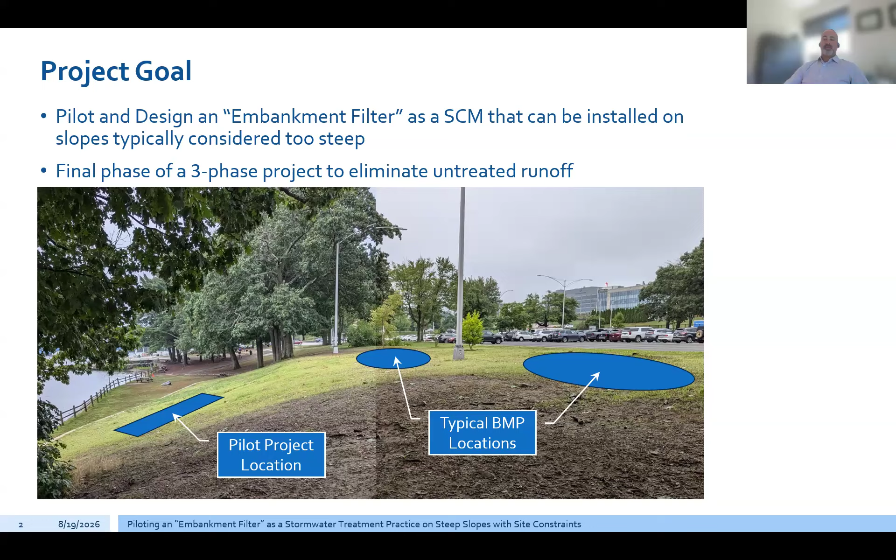And this project is a little bit unique as well, in that it's actually the final phase of what ended up being a three-phase project to eliminate untreated runoff through a stormwater outfall. The initial phase was conducted several decades ago, I think, that removed runoff from a portion of Lake Ave, as well as, I believe, a portion of the parking lot associated with that large building in the background there. More recently, DCR removed a large portion of the remaining parking lot, which was going to this outfall, and routed it through a rain garden. So this is like the last piece of the puzzle to get rid of what was previously an untreated discharge and now is going to be removed entirely.

So just quickly on the watershed and the receiving water. The site is located along the west side of Lake Quinsigamond, within a highly developed area. It's sandwiched between Lake Ave and the lake itself. It's located near Route 9. Interstate 290 is located towards the north. The watershed itself is very highly developed, as you'd expect for a water body located on the border between Worcester and Shrewsbury. There's a mix of residential development as well as commercial and roadway development throughout the watershed, as well as right along Lake Quinsigamond itself. The lake itself, I believe, is artificially impounded.

It's now about 4 miles long and has been used for decades now for a combination of swimming, boating, fishing, active, passive recreation, pretty much everything you could think of for a water body. Again, located within a heavily developed area, so it sees definitely a lot of usage throughout the whole entire year.

So Lake Quinsigamond itself is currently listed as impaired for bacteria, dissolved oxygen, invasive plants, as well as a number of other impairments. And most notably, Lake Quinsigamond itself flows to the Blackstone River, which goes all the way down into Pawtucket and Providence, Rhode Island.

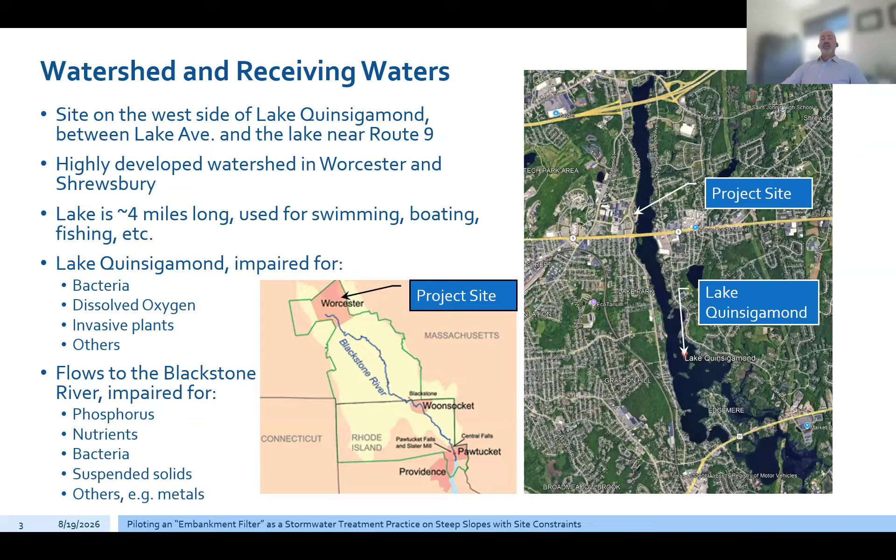And depending on how far you go, it's essentially impaired for not to say everything, but pretty much everything. Phosphorus, there's nutrients, bacteria, TSS. There's metals once you get further down there towards the mill towns around Woonsocket. So, definitely a lot going on with the water body and more specifically the site itself.

So the site itself is essentially located directly next to a heavily used parking lot. Through much of the weekdays, it's used as a commuter parking lot for there's a UMass Amherst, or actually I think it's UMass Memorial medical center that's located across the street. So Monday through Friday, this entire parking lot is filled with cars in every available space, and oftentimes in areas that are not necessarily spaces.

And throughout the weekends, there's a number of park users that are using it for swimming, fishing, et cetera. There's actually a swimming beach kind of just to the south further of the photo on the left. And what's even a little bit more interesting is it's actually located at a part of the park called Regatta Point. And the reason is it's periodically used throughout the years for sailing regattas. So it was actually kind of interesting that the satellites happen to capture one of these regattas in place.

So you can see that throughout the year you have these boat storage and not only boat parking, you have the boat staging areas, and then even next to where our pilot project location is, you can see the red and blue squares that are actually tents that get used for, I'm not sure, shade probably during the regattas themselves.

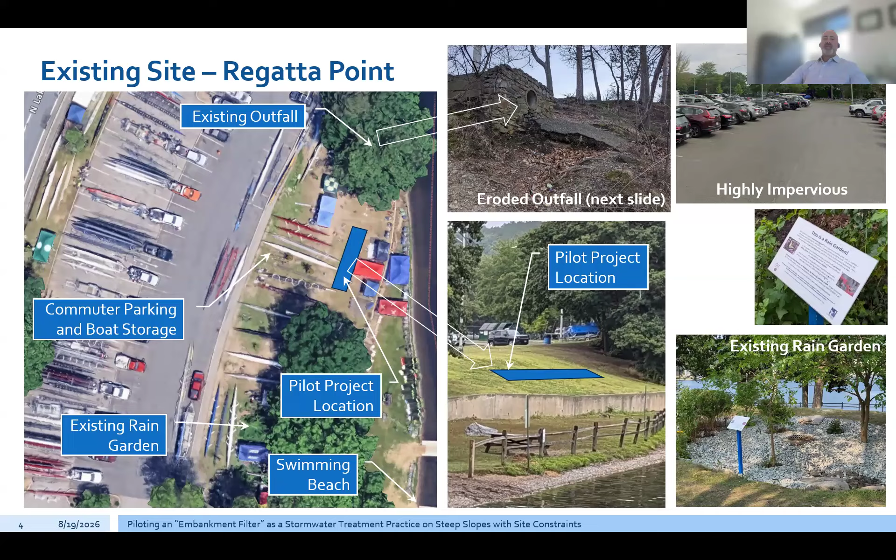I previously mentioned that there was a rain garden that was installed just kind of south of where our proposed pilot location is, which is capturing runoff that was previously untreated. The photo to the far right shows what it looks like relatively recently, along with a small informational kiosk that was developed. So our current site right now, which is what we're going to end up treating, discharges to the outfall as shown in these couple photos here.

So the one on the right kind of gives you a flavor of what's going on at this location right now. So the existing outfall is located about 12 feet higher than the lake itself. The runoff is running down about a 2-to-1 slope. You can tell that over a period of years, various efforts have been made to try and stabilize this slope. You can see there's asphalt that's been poured there in various stages of deterioration.

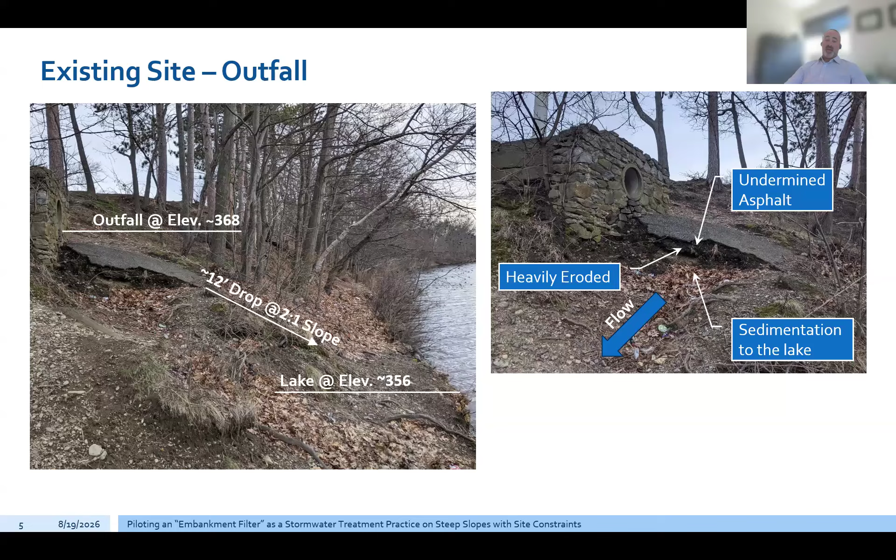It's been undermined, it's heavily eroded, and kind of all of which is providing sediment and sedimentation down to the lake that is currently untreated. So what we're really looking at doing is trying to remediate at least some of these impacts to the lake by installing a stormwater control measure or a BMP, again, in an area that you wouldn't typically put it.

So just some of the site constraints that we were dealing with as part of this project. So again, relatively steep, more or less kind of 4-to-1 slopes, as you can see in the two bottom photos. The one thing I haven't mentioned yet is, to make things even more difficult, at the bottom of the 4-to-1 slope, there's about a 4-foot high retaining wall that runs between the slope and about 10 feet away from the lake itself. And to make matters worse, again, it's a commuter parking lot. It's heavily used on weekends, weekdays, et cetera. So, we really couldn't be sacrificing any parking areas and so on and so forth.

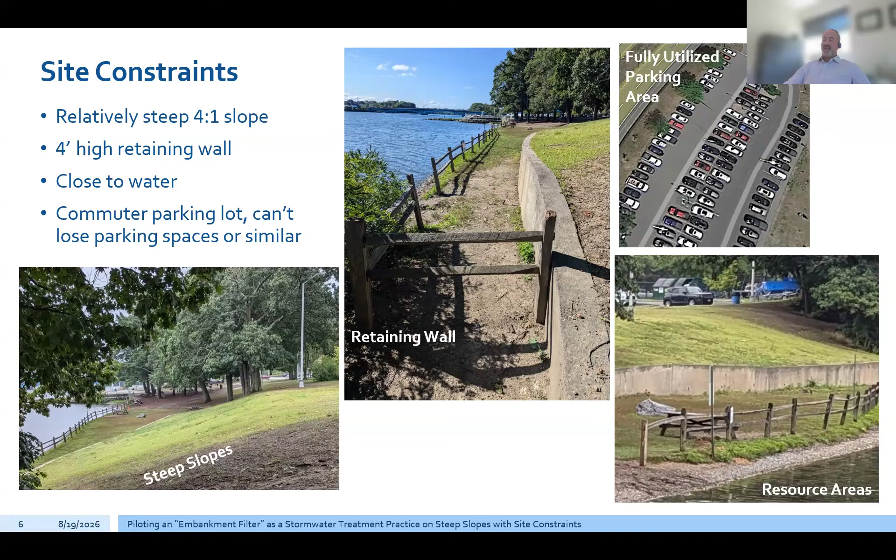So we tried to not make this difficult on ourselves, but we tried to kind of pick a site that you would certainly not be ranking at the top of your list to show that maybe something can be done at some of these locations with a little bit of creative thinking. So again, the last slide, I kind of mentioned that it's located close to the lake itself.

So there was a number of environmental permitting issues that we had to deal with throughout the project itself. So we're very close to inland bank, as you can imagine. The entire project itself is located within the 100-foot Mass DEP buffer zone. We also had 15-foot and 30-foot local buffers associated with the Worcester Conservation Commission and their local regs that we had to contend with.

And even more so, we also were in bordering land subject to flooding, which was actually a little bit surprising once we got into it because there's actually BLSF located above the retaining wall itself, which again is 4 feet high, 4.5 feet high, but most of it is located down towards the relocated outfall, which I'll get to a little bit later.

So total impacts ended up being about 4,600 square feet of permanent impacts within the buffer, another 10,000 and change within the temporary. Most of the temporary was associated with just grass seeding because the grass, as we were doing this project, we knew was going to get torn up by construction equipment, and the grass itself wasn't in great condition. So we wanted to, at least while we were out there, kind of take some steps to remediate and beautify the area while we were going to be disturbing it anyway.

So, what did we end up doing for this? Well, we ended up coming up with essentially a sand filter. We were a little bit limited again with the combination of the steep slope and then having to make it even more steep and the retaining wall about what we could do. So just kind of some of the key components of what we were getting at is in order to get some water storage is we had your existing grade, which is again about a 4-to-1.

We had to do some new grading in order to kind of carve out an area to do some water storage that is again on the side of a slope. So we needed to carve out some area that could provide some storage without making it so steep that it couldn't be maintained or mowed, or that it would be substantially detrimental to park users who, again, use this area a lot. So we ended up kind of carving out this area with some stormwater storage.

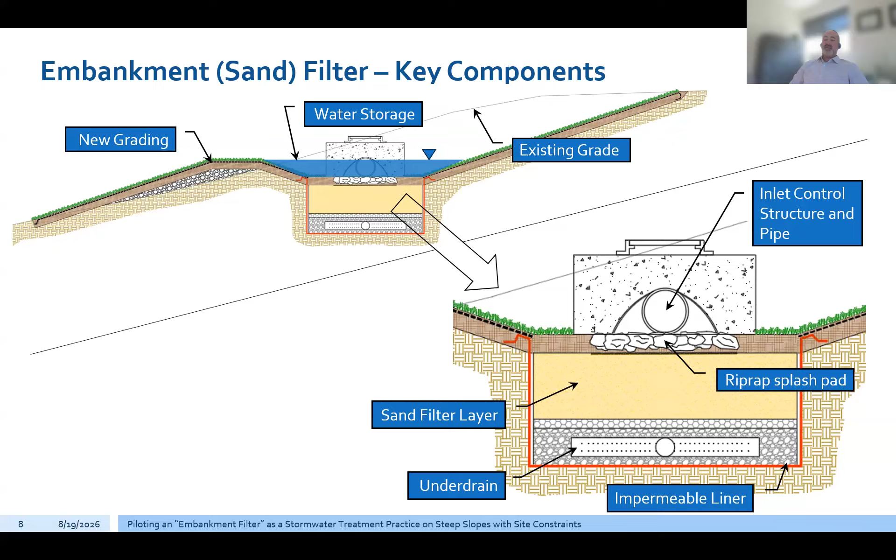And then down on the right is kind of like the primary features of what it is. So you have your sand layer, you have an underdrain layer to basically capture your runoff that goes through the sand, and then an impermeable liner because we don't want to be infiltrating at the site because again, it's located right behind that retaining wall, so we don't want to be contributing some hydraulic loading onto the retaining wall itself, or risking potential preferential pathway and a breakout of stormwater that could potentially break out along that slope further down and cause erosion or some other adverse impacts.

So the same thing kind of in profile view. So you have your deep sump inlet structure in the pipes along with a sediment forebay and splash pad. So we wanted to make sure that we provided some different options and different potential for a removal of sediment before it gets into the actual SCM itself. Again, the sand filter layer, which then filters stormwater down into an underdrain. We incorporated an underdrain cleanout in case there was sediment that maybe got into the underdrain and could plug it up.

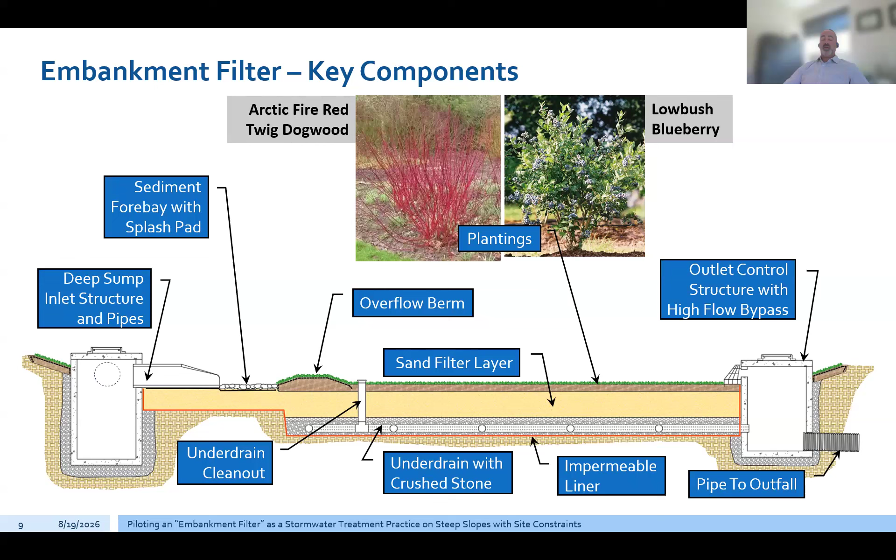We also incorporated an outlet control structure with a high flow bypass, which I'll get into how this thing actually functions during some low flow events and then high flow events in the next couple slides, but just to give you an overview of the different components. And the last thing that DCR ended up doing during construction is they actually ended up planting a couple plants that are sort of optional, but they thought it'd be beneficial to kind of beautify this area a little bit. So they planted some Arctic fire red twig dogwood and some low bush blueberry as well throughout the SCM itself.

So as far as how it works during overflow conditions, this would be in the event you get a thunderstorm or just something that the sand filter itself is incapable of handling on its own. So again, it flows through the deep sump inlet control structure and the sediment forebay for TSS. It will continue to go through the sand filter and get some treatment down into the underdrain. However, it will also flow through the high flow bypass and into the outlet control structure and then flow down to the lake itself. So what this does is it prevents the sand filter itself from becoming overwhelmed or backing up into the system. So it's trying to provide an additional way that the stormwater can outflow and bypass the system safely while preserving everything and then still making it into the lake itself.

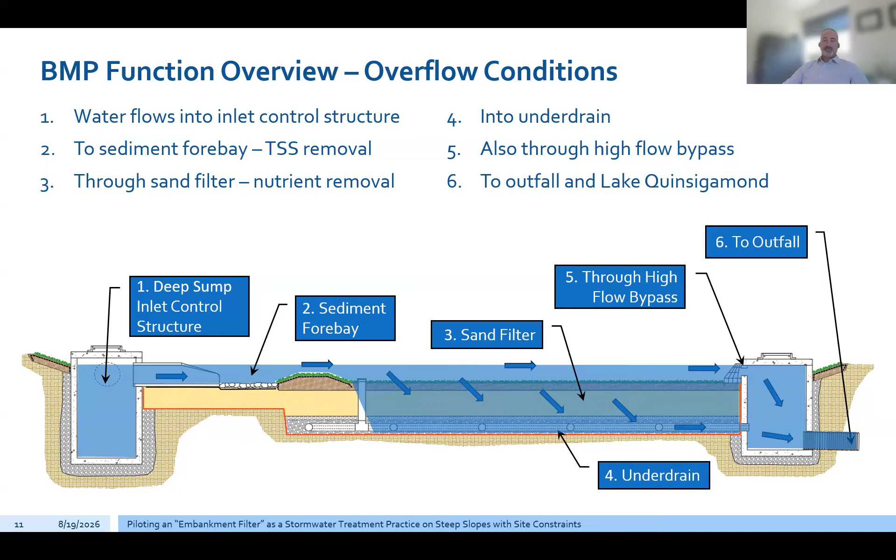So this is after construction. The photo on the left is actually what it looked like after construction. You can see that everything was kind of disturbed, and eventually it will grow in. So the two photos on the right, we ran it through AI real quick just to kind of showcase theoretically what it could look like if the grass were ever to grow in. I'm not sure it will ever get quite this lush, but possibly, who knows? The two photos also show the low bush blueberry and the dogwood that we installed, as well as the inlet control structure and the outlet control structure.

It's a little bit difficult to see based on the photos, but there is a small sediment forebay in front of the inlet, and even though it looks like the outlet structure itself is kind of flush with the bottom of the system, it's not. We kind of ramped it up, so there is some ponding, in other words, that will be allowed in this system before it actually gets to the outlet control structure itself.

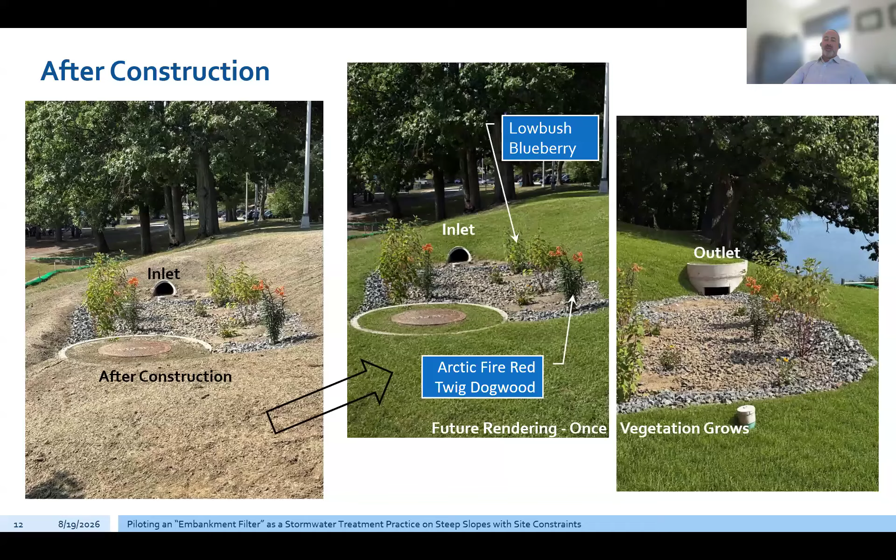So as far as water quality improvements, we were able to treat just about the 1 inch water quality volume. We came in at about 97%. One of the things that ended up being a little bit surprising is when we actually started the project, we thought there was going to be a bigger contributing area, but then once we got into it, we realized how much of the existing contributing area had already been disconnected. We were limited somewhat by a relatively small contributing watershed. So we only have about 0.2 acres altogether. Only about 0.11 is actually impervious.

So along with the relatively small contributing watershed and the site constraints that we had to deal with, that kind of limits our water quality improvement and phosphorus reduction potential. Even more problematic beyond that is that because we had the retaining wall, we couldn't infiltrate, which further reduces our phosphorus removal. But we got about 0.08, so not quite a tenth of a pound of phosphorus reduction a year, about 4 times that much of nitrogen, and then some TSS.

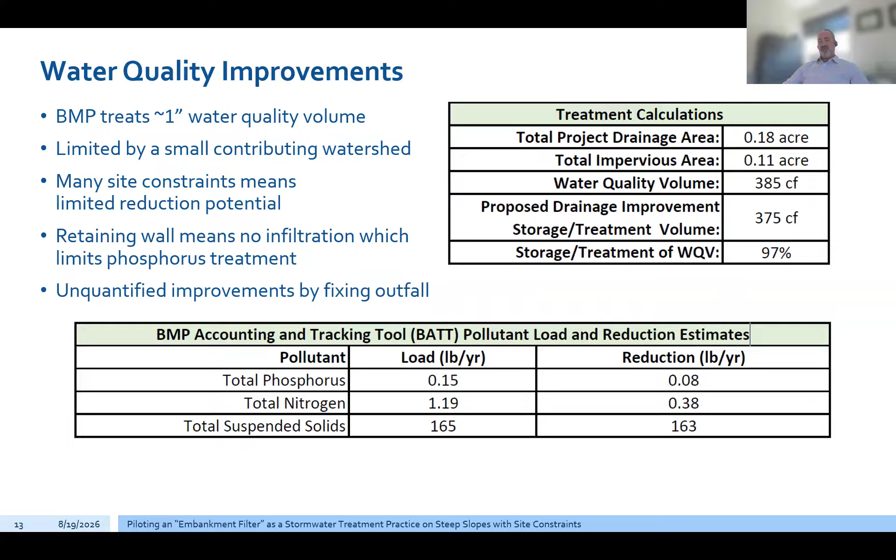And again, this is all based off of the EPA BMP accounting and tracking tool, or the BATT pollutant load and reduction tool. It doesn't include the additional reductions that we'd be removing from the water body itself by improving the conditions around the existing outfall, where it's currently eroding, contributing TSS and so on into the lake itself. So that's being stabilized. So there's those improvements as well, which are not necessarily being taken credit for by the BMP improvement itself, but it's still something.

Coming to some of the other project components, so we designed it for ease of construction. We didn't want to make this thing so prohibitively expensive or prohibitive that it was going to turn into a $250,000 improvement project that was going to have to be constructed with specialized equipment, and that couldn't be implemented by DCR themselves. I think DCR actually was able to utilize some on-call construction contracts, so they were able to basically build this thing using resources that they either had available or readily had available.

In the future, there will be a walkway with stairs and a railing for pedestrian control and fishing access. So there are a couple of reasons behind that. One is to try and keep foot traffic away from the BMP itself, as well as providing an access to what people are currently using right now for fishing access down to the pond and the lake. So there's already kind of a preferential pathway or a desire path that people are using to get down to the lake to fish. So DCR is looking at providing a formalized access way down to the lake at some point in the future.

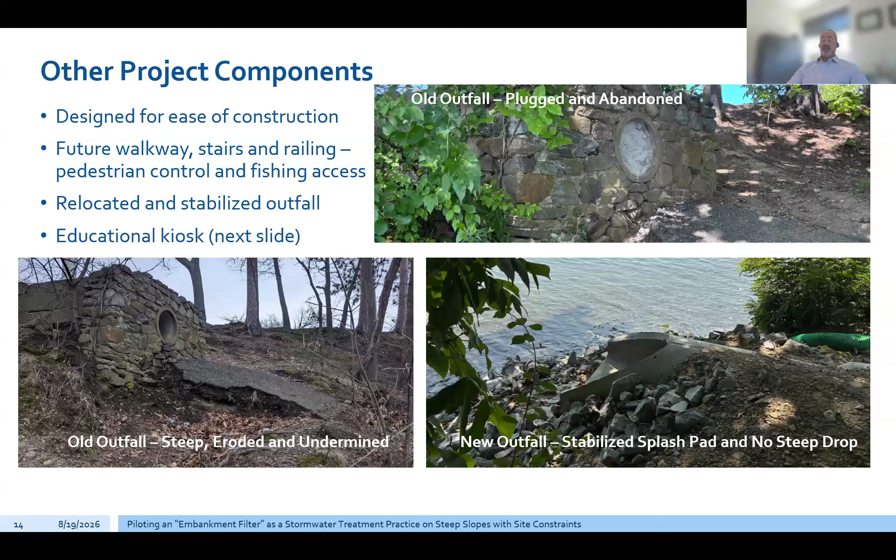I mentioned that we plugged and abandoned the existing outfall, which is the photo on the top right, and we relocated it down closer to the lake itself. So what this allows for is there's no more steep drop. There's a stabilized splash pad. And so you're not going to have nearly the erosive velocities and hopefully the flows that you're having right now that are coming down the photo in the bottom left there. We have the steep, eroded, undermined outfall area that's causing some erosion and potentially sedimentation into the lake.

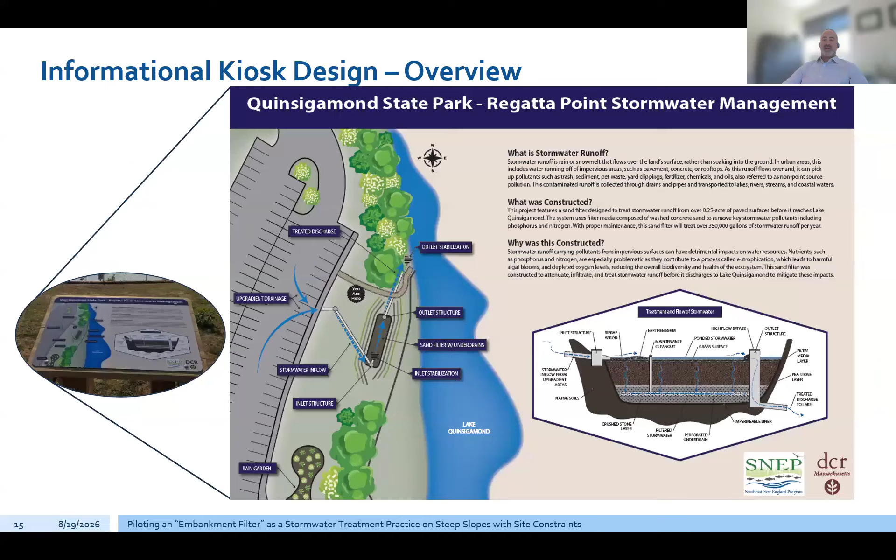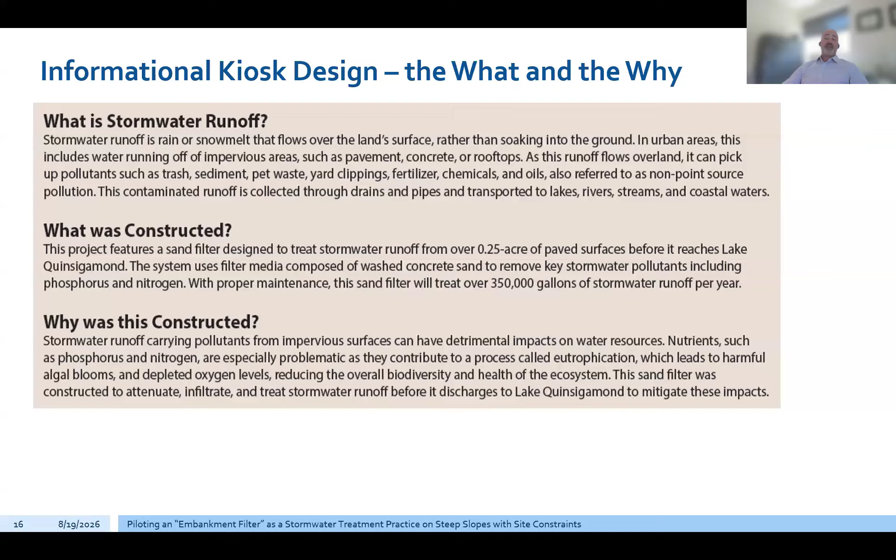So kind of the final thing that we did is we actually designed an informational kiosk that was installed at the site. And you can see what it looks like, the overall kiosk design in this layout here. And there are a couple different components of it. The first is sort of a what and why of background information that is designed towards park users. So things like, what is stormwater runoff? Why does it have detrimental environmental impacts? What type of contaminants may be in the stormwater runoff itself? And then as to why was it constructed, what is the function of it, how much will it treat, and the benefits of it.

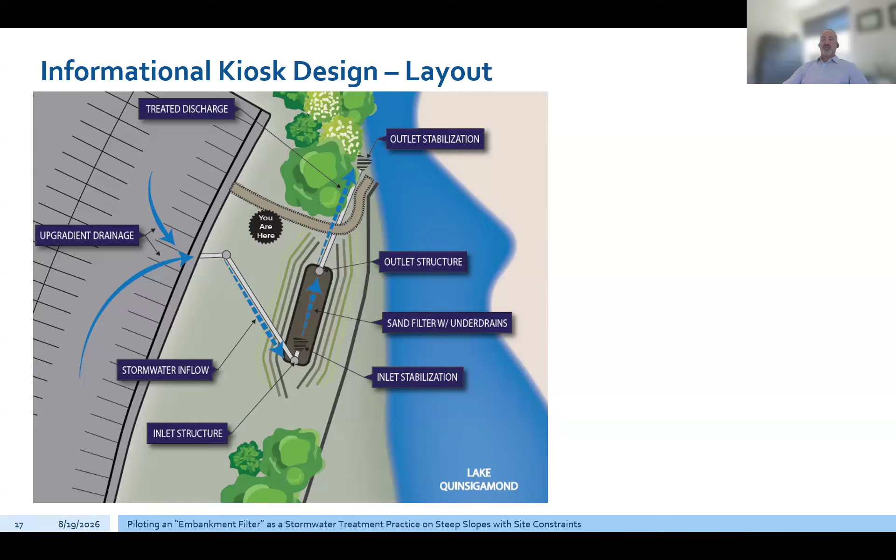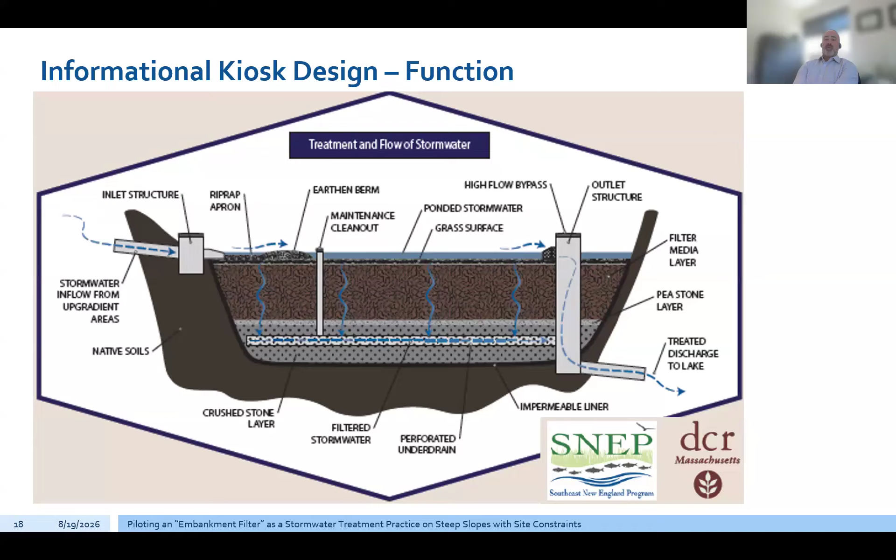Then we have sort of this cartoonish layout of what it is itself, along with some of the key components that I touched on earlier. You have the upgradient drainage that's contributing to it, the inflow through the BMP itself, out of the outlet control structure, and then to the stabilized outfall along Lake Quinsigamond. And then another kind of cartoonish version of the function of it in a profile view. So essentially the version of what I presented a few slides earlier about how this thing is working throughout the project itself. And all that gets incorporated into the kiosk design.

So just to kind of close out here, some of the challenges and the lessons learned: again, many site constraints, a steep site, retaining wall, lots of resource areas, a heavily used area, etc. I mean, this was done by design as part of the pilot project to showcase that there are things that can be designed and implemented, not necessarily at a flat area, end of pipe typical scenario where you would typically plan on constructing and designing and implementing a BMP.

Limited available watershed, which again, most had already been disconnected. So we were further limited as to how much phosphorus and other pollutants we were able to remove from the site itself. Limited storage provided when running parallel to the slopes because we already have a 4-to-1 slope, so we can only kind of regrade it and carve out so much of an area before it's just going to get too steep or it's just not going to be a usable area. We really wanted to try and still preserve as much of the area as we can for park users and so on and so forth. Limited dollars for implementation.

I mean, again, we didn't really want to make this a $250,000 construction and implementation project that was just going to be not really feasible or possible at a number of locations and other sites. So we wanted to kind of do a proof of concept that even with some relatively small dollar amounts, we can still do something here.

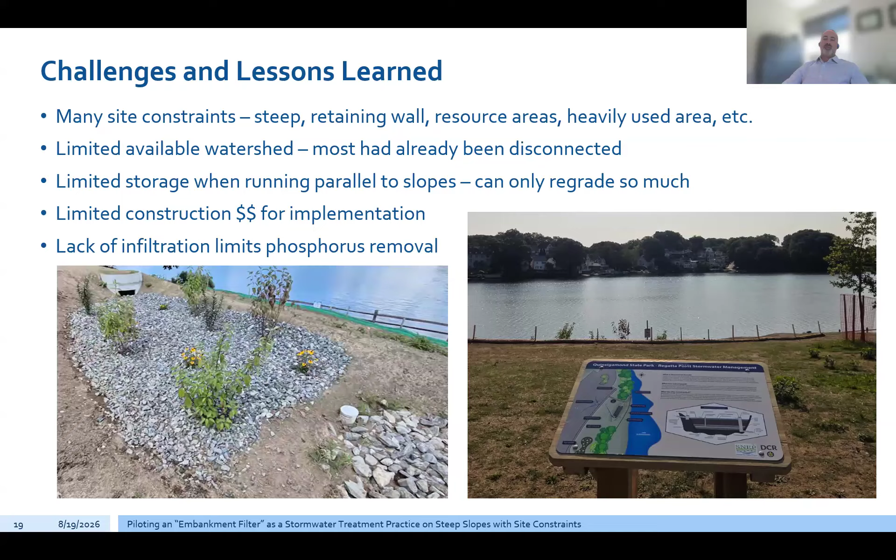And then again, based on not wanting to do infiltration because of the retaining wall, that further limits phosphorus removal, because instead of going to an infiltration style BMP where you're typically getting better phosphorus removal numbers, you're limited to sort of a filtration style BMP. So with that, that is pretty much it.

I just wanted to thank specifically DCR for their involvement in this project. They were instrumental in getting the grants. They coordinated the project itself. They provided design review. They coordinated the construction. They were great. So just want to thank everyone for their support on this project. And I hope this presentation was beneficial.

Thanks, Nick. That's great. Should we hold the questions till the end, Alex, you think? Yes, I'd say hold questions and drop them in the Q&A chat so we have time for both presentations. Okay.

Sounds great. Okay. So with that, I'll introduce then our friends and grantees with the Pocasset Water Quality Coalition. Keith Barber has been amazing in his diligence and persistence in working on this project. And we also have, I think, Paula Serta with us and Dan Barnett, who's a former NRCS engineer serving as the consulting engineer on

this project. And this is another 2023 SWIG grant that we provided to the Pocasset Water Quality Coalition, which, for those of you who aren't familiar with it, is in Bourne on the western end of Cape Cod. And it was one of our smaller grants at $37,000, but it's certainly one of our most cost-effective grants in the amount of really amazing work these guys have done, and a truly community-driven water quality project. So with that, I'll hand it over to Keith and Paula and Dan to tell you about this project.

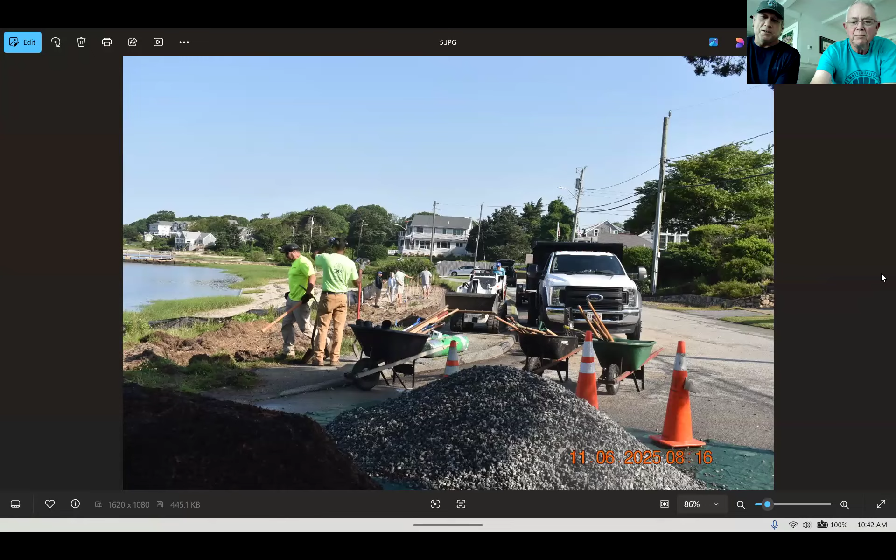And then Keith and Paula had many, many volunteers there, and they just carried granite and carried riprap and stone and concrete bags that granite curbs were placed in. And they really took something that was on a piece of paper and made it real.

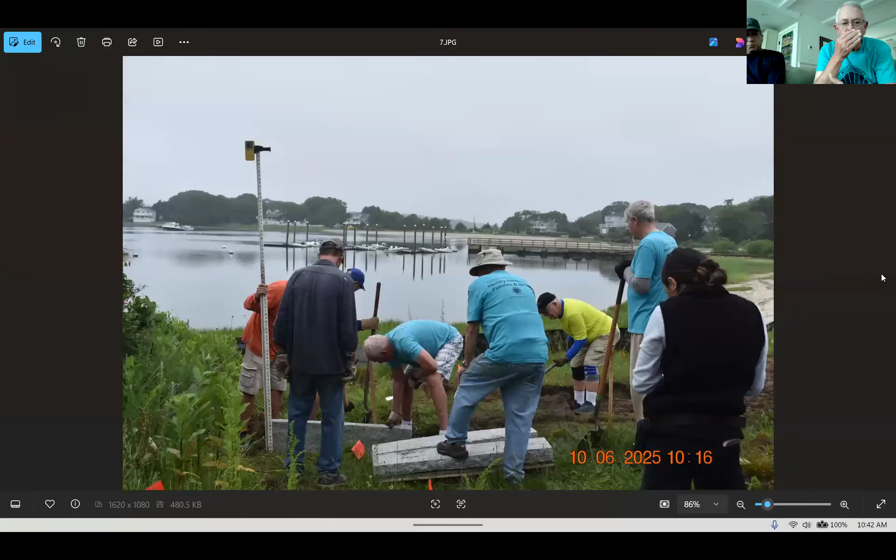So we had super community involvement, including businesses who we approached to say, this is what we're trying to do. Can you help us? And the construction people that you see in the previous slide, that's a local landscaping company who volunteered to help us for an incredibly reduced rate of cost.

So in addition to that, we had the Mahoney's people in Falmouth gave us a tremendous discount on plants. The plants we had were all according to the guideline from the Association to Preserve Cape Cod and from the Bourne Conservation Department, who supervised the project from the beginning when we had to get permission to just start.

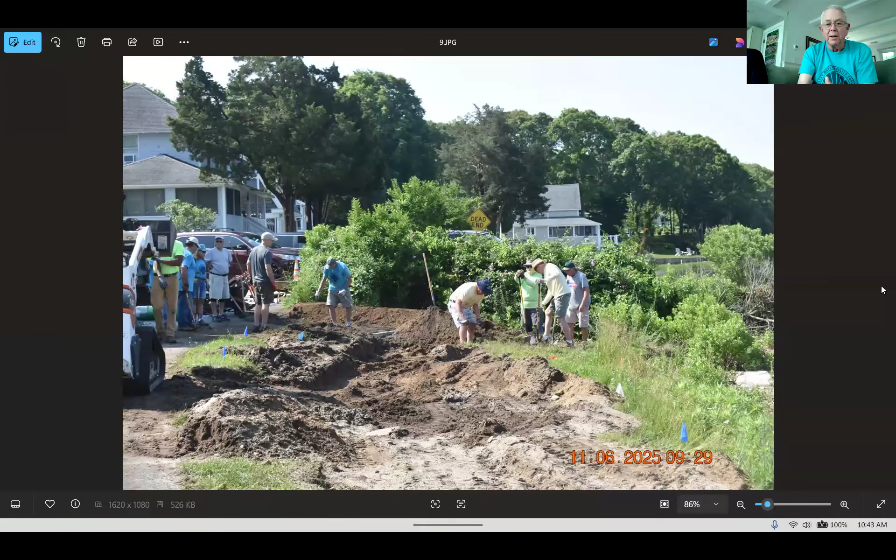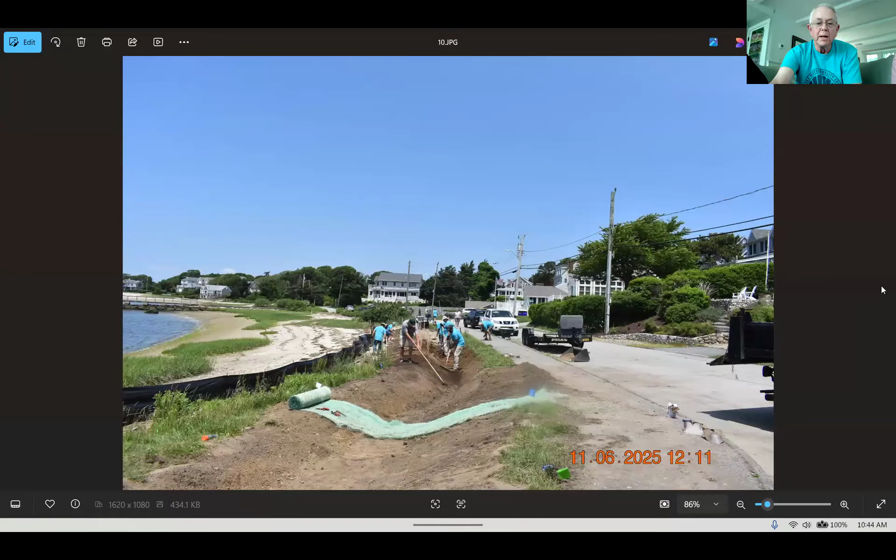So as you can see, our first day was a bit challenging. We got going early, and then about 1 o'clock we had a thunderstorm. That was the end of working for that day. So we came back the next day, and we kept going with all of Paula's volunteers, who you can see just kept the project moving.

Oh, so I had the pleasure of being the volunteer coordinator, and really Keith did the hardest part. He knows every person in this neighborhood and in the neighborhoods close by. So getting people to help was easy for me because he had already talked to a lot of people about it. And we ended up, after the 3 rain gardens were done, with a total of about 53 or 54 people that had volunteered at different stages in all 3 of the gardens at different times.

And it was a real grassroots effort. And I mean that literally. I was thinking that as I was looking at these slides. I mean, people were down on their knees pulling grass and planting grass at the same time.

I haven't seen these slides in a while. Looking at them now, I'm thinking this would be a really perfect cover for the AARP magazine.

We did the gardens in the middle of the week. I think we started on a Tuesday. Yeah. And then one of them we went to Thursday. And all three of the gardens were done in the middle of the week. So that eliminated some of the volunteers that wanted to be with us that had to work. So the age group was mostly retirees here. And I got to say, they did very, very well.

That pile of gravel that you saw had to be put into a wheelbarrow and then spread out, and it got done. And I have to say, it was a really gratifying experience, and it has been. And I still have people coming up to me to volunteer for the next project.

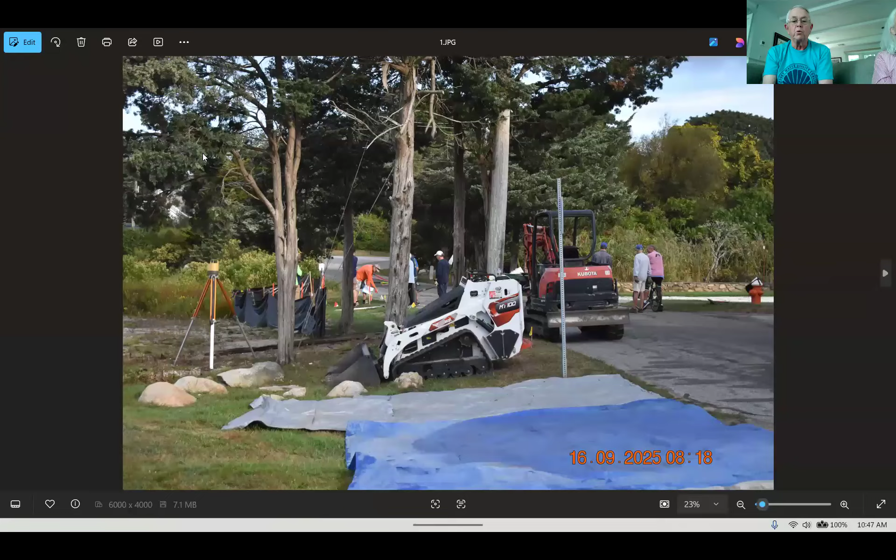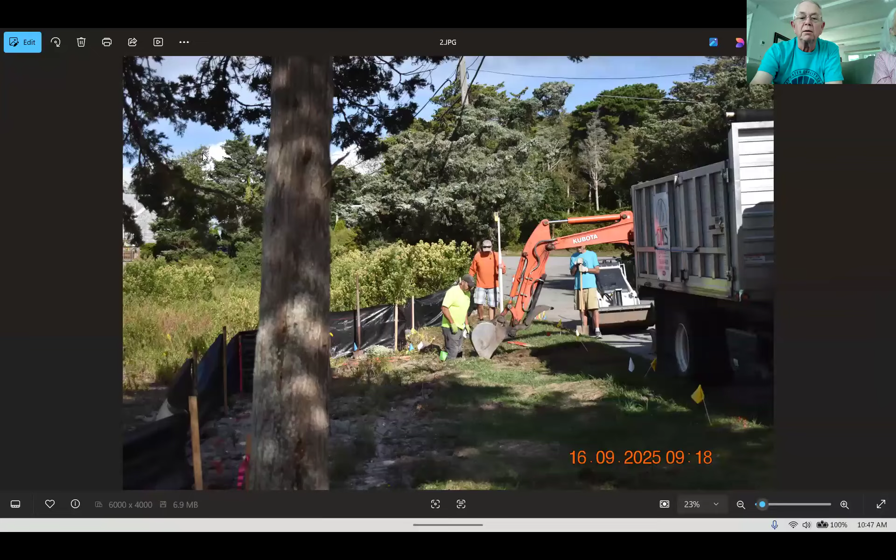So now we get to building rain gardens 2 and 3, which we did both at the same time, because they were much smaller and we had more help. So I'm going to get to the slide here where you can see Dan always in his uniform for building rain gardens. And our friends again at CMS Landscaping. So this was one of the fun parts.

So for the second and third rain gardens, school was on. So we were able to get the Upper Cape Technology environmental students to come and help us. So Paula, can you talk a little bit about that? Yeah. When we did the first garden, there was a little learning curve. Picking up those granite pieces and placing them where they needed to go was challenging for the group that was working on it. So this group that you're looking at right now came in very handy for the second rain garden. I think they enjoyed the process and it worked.

And a lot of these kids didn't know, what are you talking about? What's a rain garden? So here we were trying to educate them a little bit. And you can see as we go along, they were definitely in the mode to get it done. This is Rain Garden 3, where we had split the kids and the volunteers into 2 groups. So we were building number 2 and number 3 at the same time.

So you can see the granite pieces there right on a pallet on the ground. And like Paula said, when we were lifting the granite pieces in the first garden, it was mostly a bunch of 60 and 70-year-olds. We were so excited to have the 15, 16, and 17-year-olds show up to help us. There's a couple of them right there making some cement. And it was more fun, and the kids had fun. They enjoyed it. They thanked us for letting them be part of it.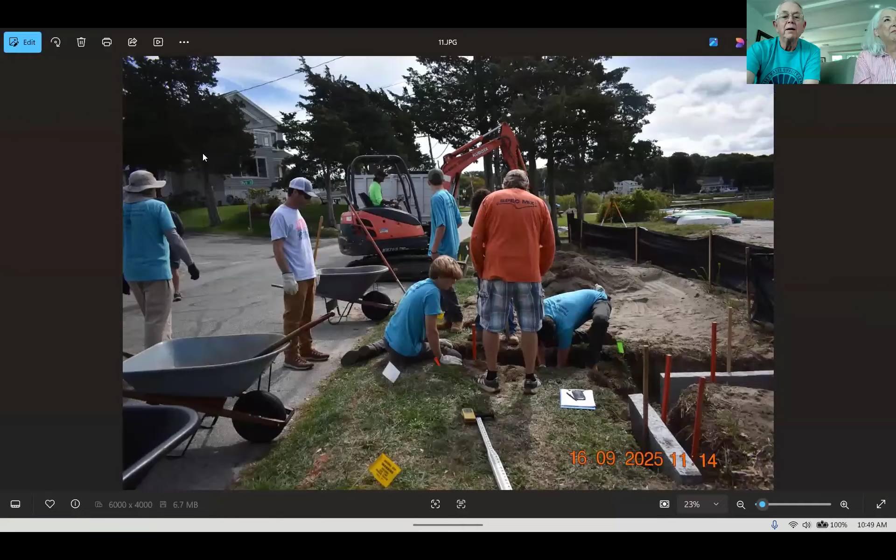They're right down there in the trenches. We have these T-shirts which we used as a fundraiser a few years ago, so we had some left over. So all the kids that wanted a T-shirt got one of our Pocasset water quality T-shirts as a reward, which of course is pretty lame.

So anyway, the day that the kids came, we bought them pizza for lunch, and they enjoyed that, and they had to leave because school gets out at like 2:10. And the rest of the afternoon, we were just back to the old people again. And here we are planting.